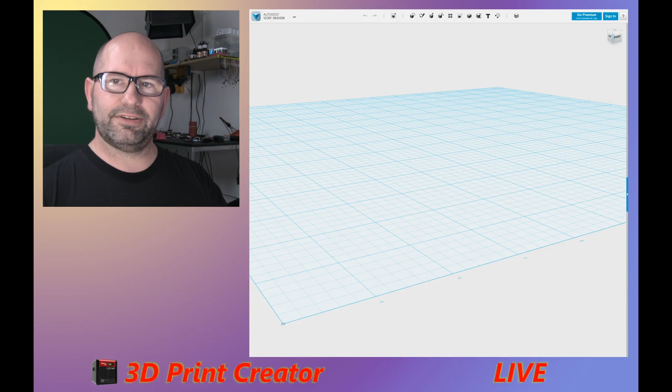In this episode I'm going to show you how I make a holder for this piece I have here. This is a ColorChecker Passport, a device used if you work with cameras that can record RAW, so you can color check your recordings and know they look nice and right. I'm going to make a holder for this thing so I can use it in various ways.

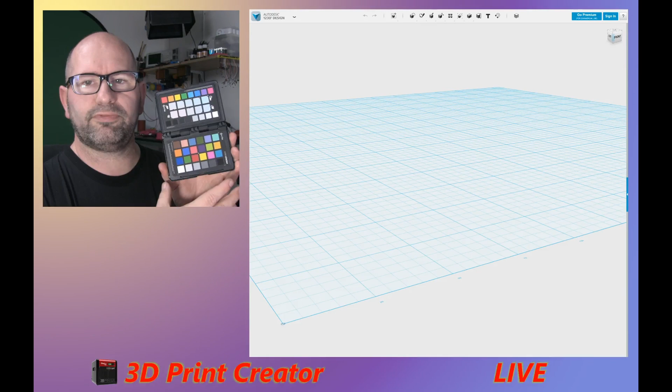So first we have to measure our card here, and the way we do it is by taking some calipers and measuring the size of this card, which is 125.3, and the thickness which is 6.1.

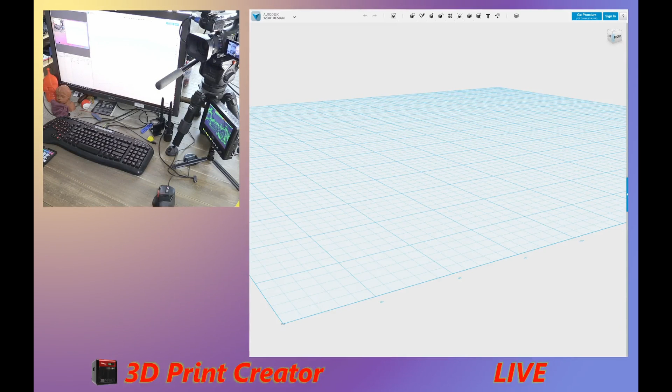And this is basically all we need to make a stand so that we can use this. Now we are going to our 123D Design here.

Basically what I'm going to do is draw a block here, from here, and this block has to be... no, I made a mistake, it has to be 20 by 150 millimeters. So this is my first block I'm starting out with.

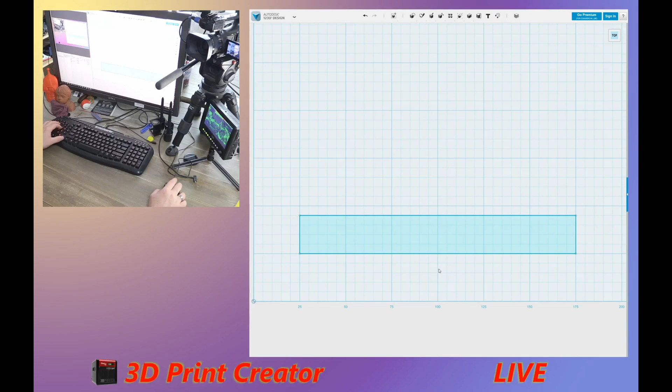And then when we have this block, we're going to shape things in it so we can work with it. In this block we have to make a new block, which is a hole that has to be centered in the middle, and this new block has to have the exact dimensions.

So I sketch a new rectangle, I do it here just for ease. It has to be 126, so I like to have a little bit of space so it can move around freely, by 6.5.

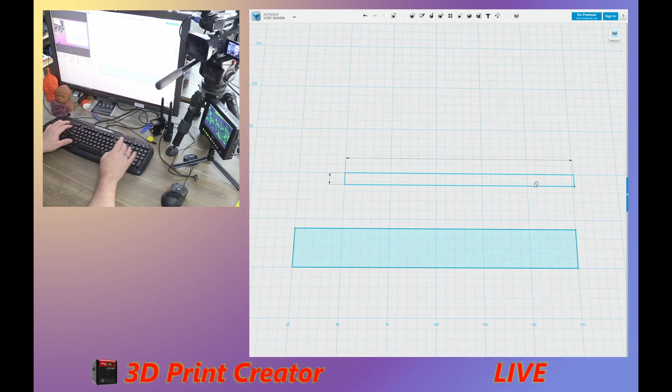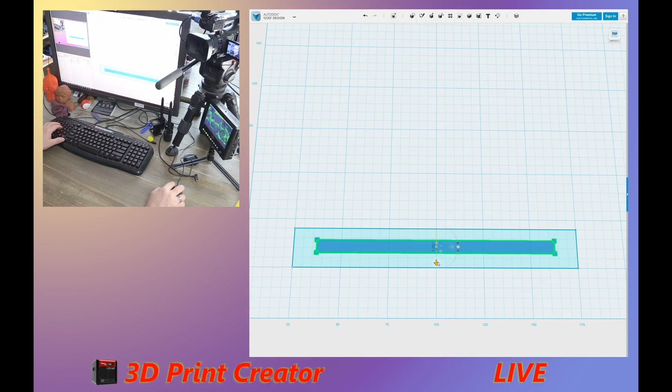Now I'm going to replace this block so it fits somewhere here in the middle, and you see it snaps to that center point. So here it snaps, and this is the exact center. And also here it snaps to the exact center, which is here.

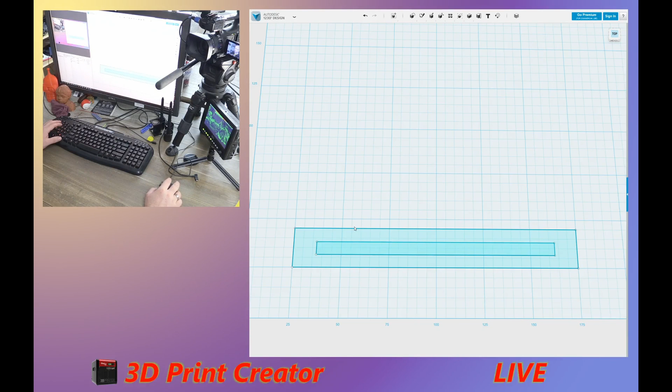So now we have the measurements set, and of course we also want this to be able to stand on a desk. So basically what I'm going to do is make a triangle out of it from here, this point, and well, this is the center point.

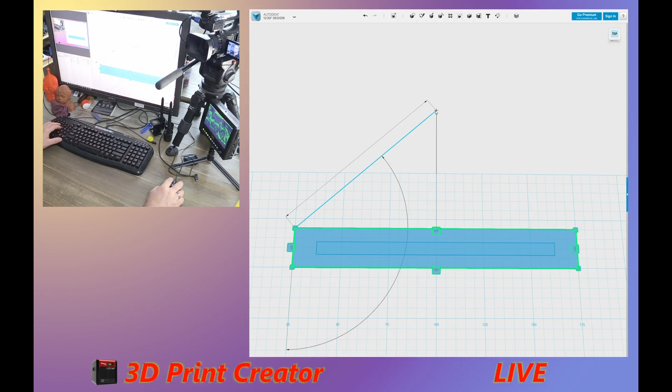So let's go all the way up here at 100, and from there go back to here, and then something like this.

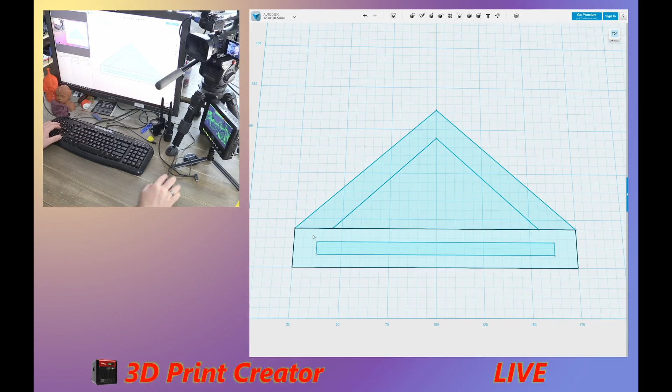So basically now what we can do is put this in extrude mode and create a solid out of it, which is, let's say, 8 millimeters high. It must be more than enough.

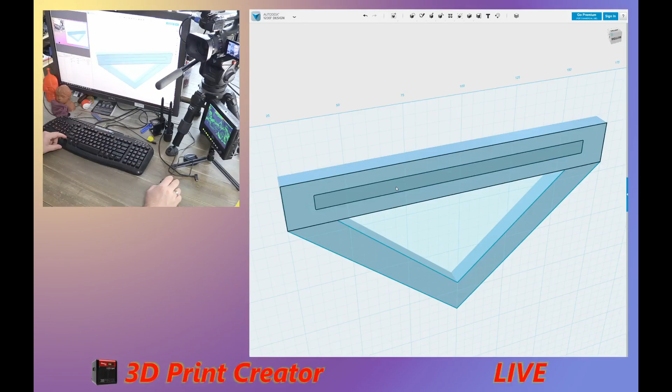Now we can go to this part here, the bottom part. We can do it in different ways. For now I'm going to hide my solids, so I can grab this sketch here and move it upwards 8 millimeters.

I'm doing this very slow. Normally I work a little faster, but I'm doing this really slow so I can show you what I'm doing.

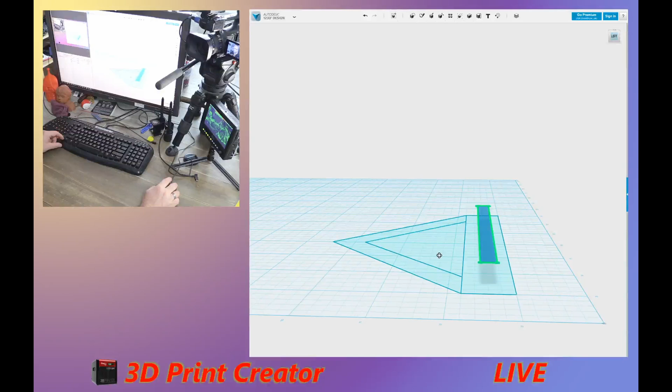Now I'm also going to rotate this mesh, or this - it's not a mesh, it's a sketch - I'm going to rotate it a little bit so it's a little bit at an angle. So again, I'm choosing this one, and now I choose to rotate it 25 or 30 degrees. Let's say 30 degrees. So that's my rotation now.

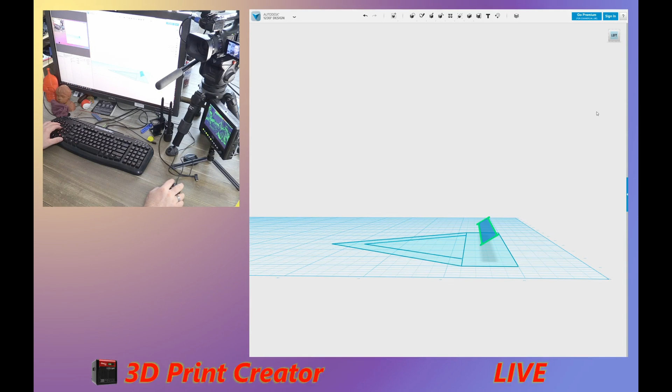And with this rotated, I can again show my solids, and you see my solid is here. And here we have a sketch halfway down the solid. This is exactly what I want.

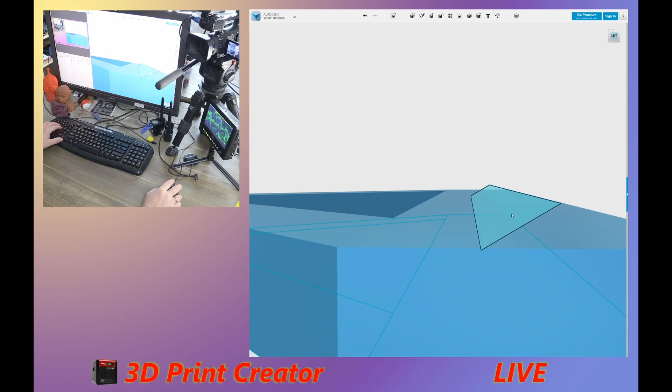Because now I can take this solid and extrude it upwards like this. And here we have this hole we created.

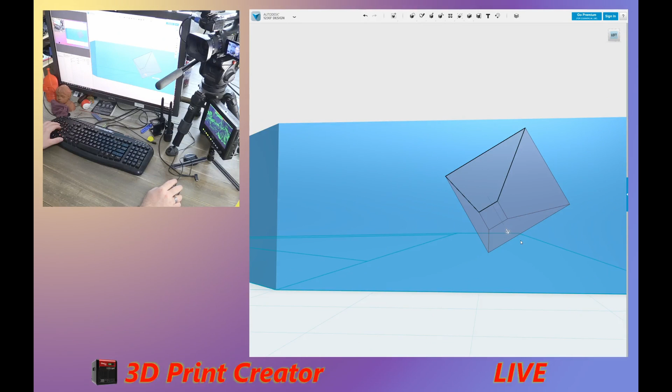And now the exact same thing can be done the other way around, like this. We go 4 millimeters in, and you can see you won't hit anything because in the hollow sides you can see what's happening. And again, we have taken some material out of the solid. Now we can hide this one if we don't want to see it anymore.

And basically what we have here is a stand which is already good. But now I want to make it a little bit nicer, and the way to do that is by chamfering the edges, because the less material I use, the nicer this thing will be. And I'm also going to chamfer the other edges.

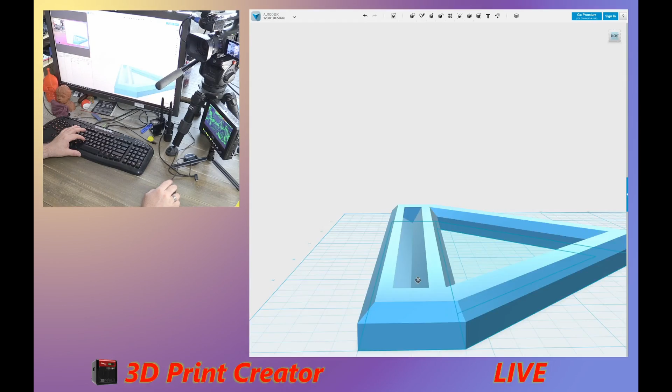So it just looks a little bit nicer. And this basically is all there is to do to create this nice part.

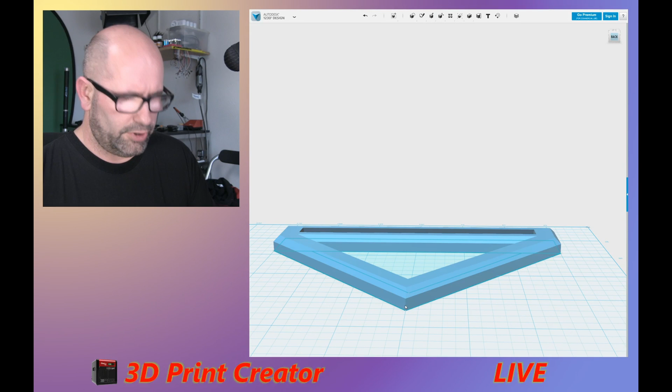So now I've created this part, and actually it's finished. This is usable and we can do everything with it, except I don't like those sharp points here, so I'm going to make it round, just because I don't like sharp points.

I want to take a look from the top side how it looks. This way it's a bit nicer. And also I have to take this part and bring it down so it's a bit nicer, just to make it nice.

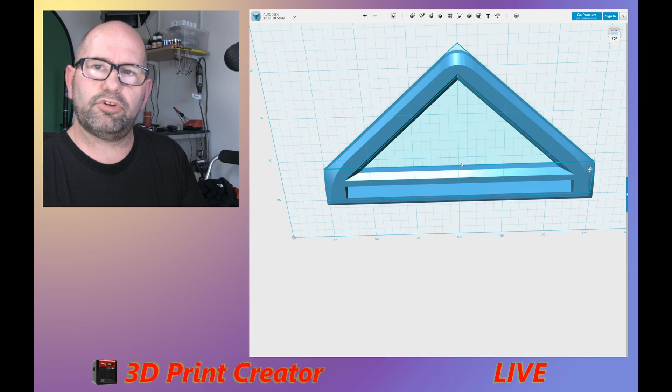Now also we can take this part and this part, bring it a little in. The fun thing is that when doing this, every time you do a thing like this, you save material. You don't use that much material, so it's great to do it this way, because the less material you use, the faster your print will print.

And then there was another thing I was curious about, because this one, this is the part, and it's a little bit rounded on the edges, and I want to know how round it is.

And this is a great little tool to tell you exactly how round it is, and this is a circle with a diameter of 7 millimeters. So at 7 millimeters, this is nice.

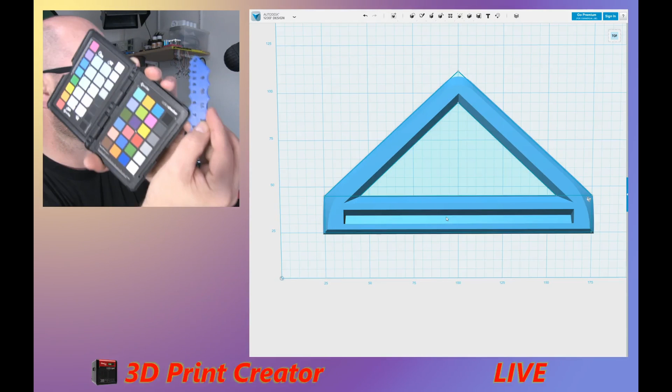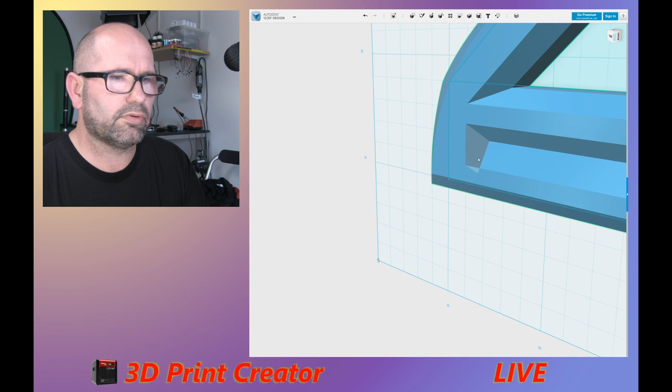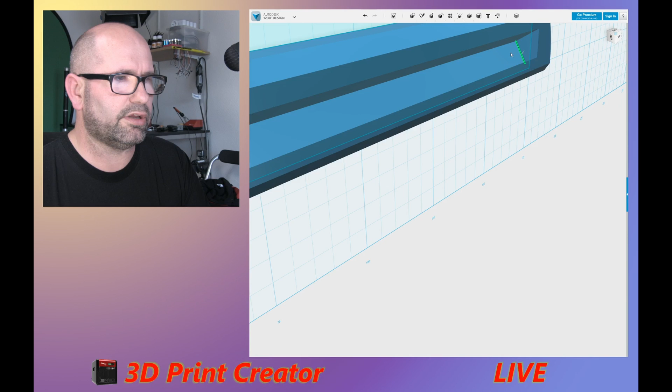That means that I can again go to the inside here, but now I choose this here, this here, and oh, I made a mistake. I have to say what I'm going to do with it, so choose this and this, and now there is this arrow, so I can select it, and I can say I want to make the round 7 millimeters. So now it should be exactly the same size.

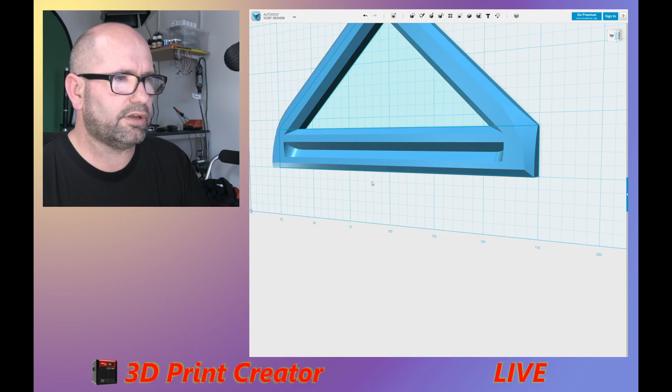And I'm going to try it out now. Currently I've lost my signal. Just don't know why I lost my signal, but as I saw the audio was coming in, the video stopped. But you saw what I did with the part.

So this part is now finished, and I'm going to 123D Design, and I'm going to export it as an STL file. The stupid thing is that with the screen recorder I'm using, it's OBS, Open Broadcaster Software, you can't see the layers that are on my software.

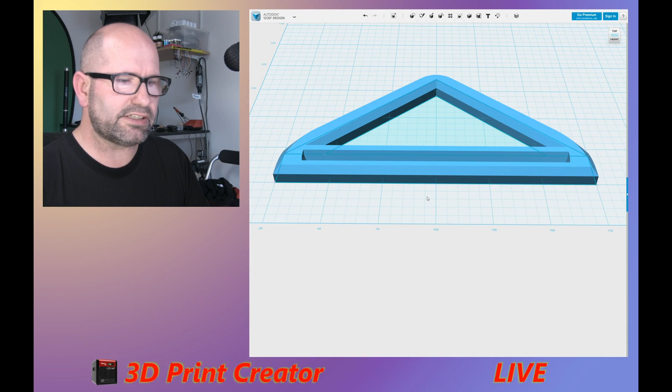So you can't see that now I'm choosing a medium coarse for the tessellation settings, and I'm exporting it as an STL file. This is done, and we can go to the STL file from the printing software, the slicer, and then see what the slicer can do with this file.

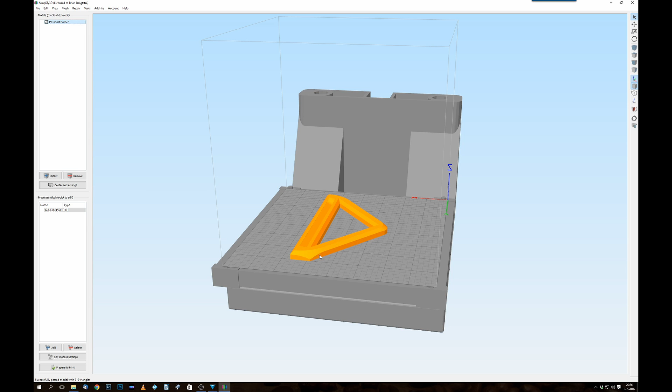So here we are in Simplify 3D, and in Simplify 3D I have imported my STL file I created, and we're going to set the settings for this file.

Well, at first let me set my layer height, and layer height has to be set on this printer I'm using now, the da Vinci Pro printer. It has to be set at 120. First layer width as well, and the first layer speed is 30% of the maximum speed I'm going to use.

I'm going to use 4 bottom layers, 3 top layers, and also 3 outline perimeters. I'm going to print from the inside out, so the print will look as nice as possible.

As addition, I'm going to use a raft as well as a skirt. This is because my print bed is not completely flat, otherwise I would have left the raft. But in this case I do need the raft, because otherwise my first layer won't be that nice.

Then at the infill part, I'm going to choose an infill percentage of 20%, but I'm not going to use the fast honeycomb, but the triangular settings.

And further on I will go to other settings here, and here I can set my printer speed, and this print is pretty straightforward, so I can print it at 60 millimeters a second, because that's the maximum speed the printer will reach. But Simplify 3D is controlling the speed, so at the difficult parts it won't be at 60 millimeters a second.

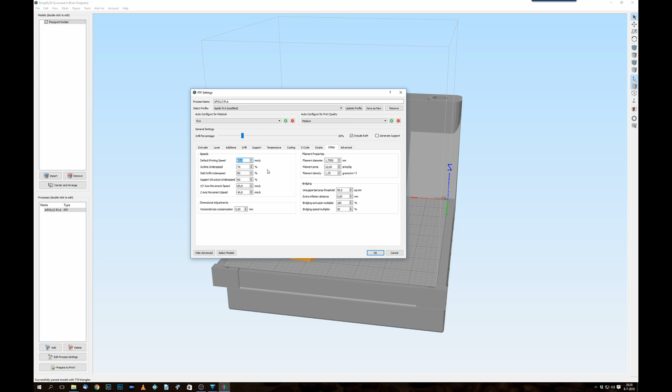When this is set, and also my temperatures are of course set right, then we go to the OK settings and we say prepare to print. And here we can see what the movement speeds will be. And if we go and take a look at it, you can see that my first layer will be printed at only 4.5 millimeters a second.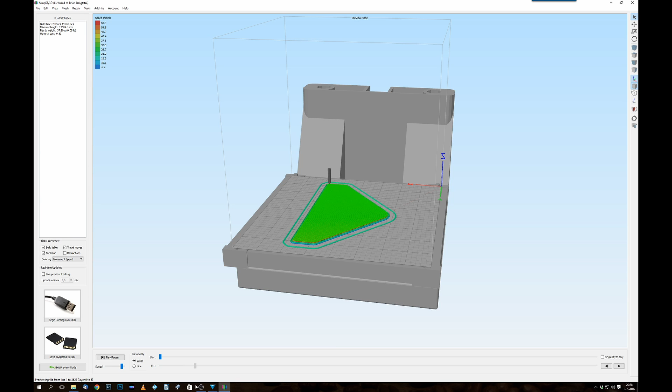After that, the printer will speed up and reach 60 millimeters a second here. Then it goes up and up, and then slows down to only 30 millimeters a second. After that, it will go to 48 millimeters a second, and this continues, with only the infill structures printed at high speed.

So now you can see that Simplify 3D is actually determining where it will use several speeds. You can see that the outlines of this print are printed slower than the insides. And when the top layer is printed, the printer will also slow down again until it reaches the real top layer at only 40 millimeters a second.

I think this is a great speed, this will work fine. So this is what I'm going to send to my printer. Turn the printer on, and then I'll make sure the camera points to the printer, and now you can see what happens next.

So here you can see the inside of my printer, at least a small part of it, because this is my time-lapse camera I'm using to record the inside of the printer. And it's now going to make a time-lapse. So I'm going to start the time-lapse recording now.

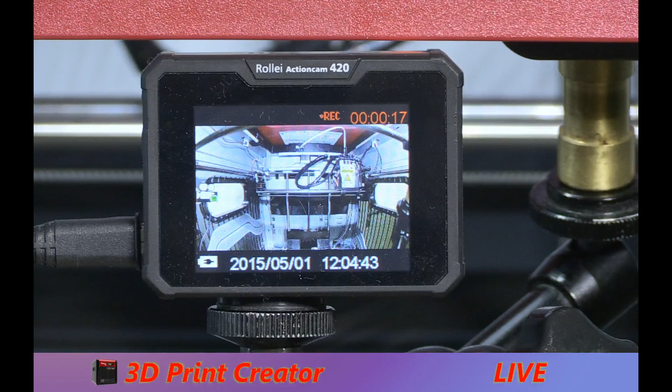As you can see, it's now uploading the file towards my printer. In the right hand corner you can see it's uploading, and on the build plate you can see it's building the file. So you have direct control of what's happening.

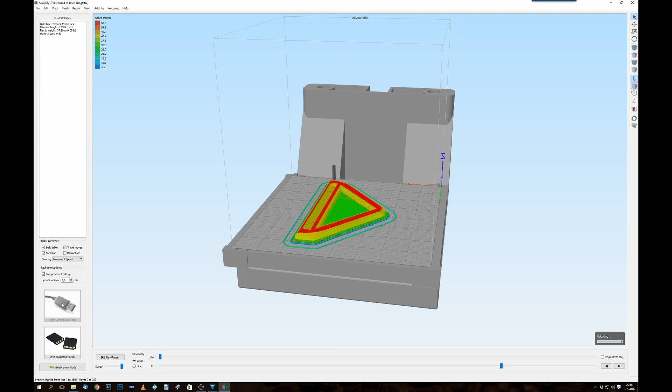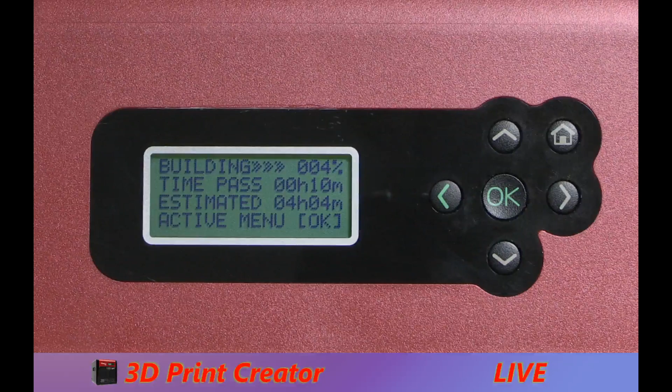So here you see the estimation of the time. Funny thing is that the estimation is, well, it's rubbish. As you can see here, we're at 4%, and it says 10 minutes have passed, and 4 hours and 4 minutes have to pass before this print is done. As you will see, this will go down very quickly, because this print will take, I think, 2.5 hours.

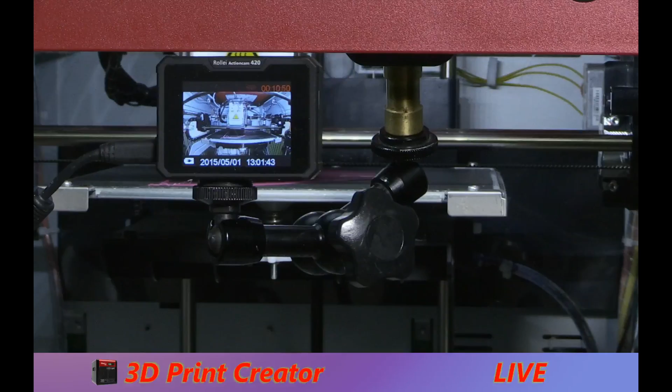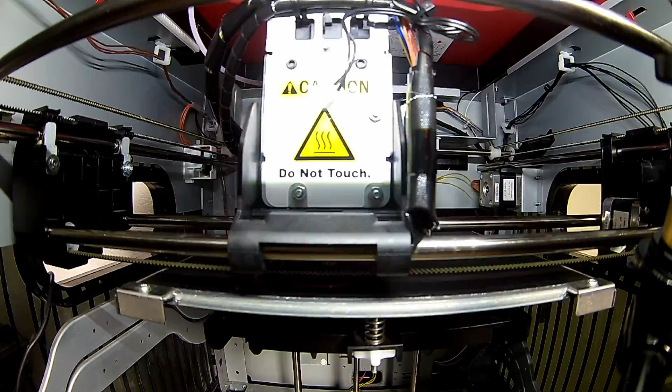And here you can see the camera mount I made. It's a fairly simple camera mount, and I use a Rollei camera for it, a Rollei 420, because it makes excellent stills, and also it can do 1 frame a second, or 1 frame every 3 seconds, or 1 frame every 5 seconds, so you can create fabulous time lapses out of it.

And the main reason I chose this camera is that when printing ABS, you can get a very hot print chamber, so everything inside the printer can get very hot. When using a GoPro, for example, you have the problem that the GoPro will get very hot as well, and you can't print with a GoPro without the battery, so you have to get the battery very hot as well.

And well, those GoPro batteries don't like it. In this camera, you can run it without a battery. So when the USB connection is set to the camera, you can see that at the left side there is a USB connection made, then you can actually use this camera on the power source. And yeah, I can use it for as long as I want. I can run it for 20 hours, 40 hours, 80 hours, it doesn't matter.

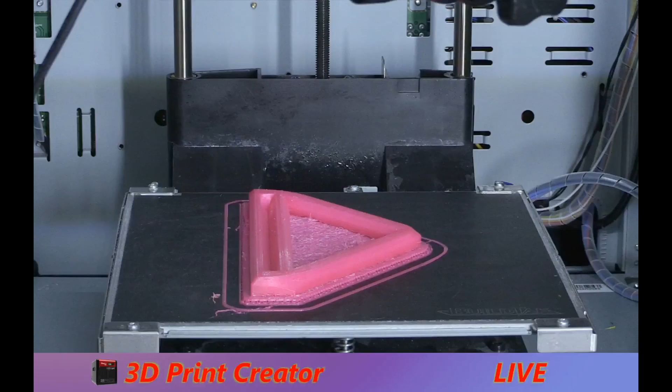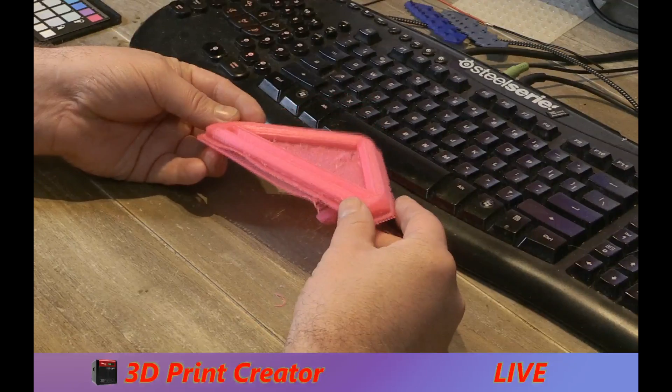So the print bed is now down, and now I can try to remove the object from the build plate. And as you can see, it wasn't difficult at all. So this is the print that came off the print bed. Let's take a look how it peels off.

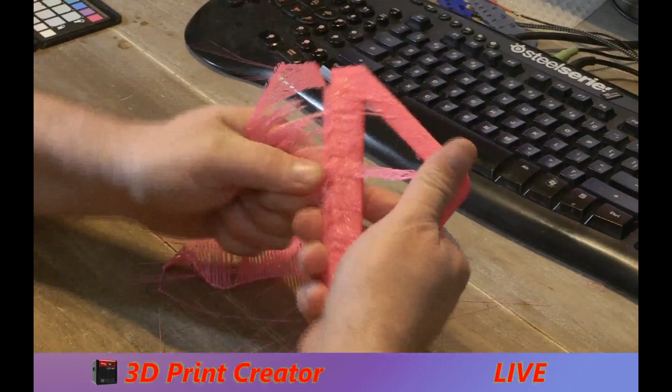More difficult to remove, so probably the temperature was set a little too high, and then everything started melting into each other.

Just by using a little sandpaper most of the time, you can get rid of those parts.

But what we want to know is, does it fit? And yes, it fits. So this is why we made it, to fit this part here, so we can use it to color correct videos. And it fits perfect. Put it in and it stays here.

So I think this mission is accomplished.